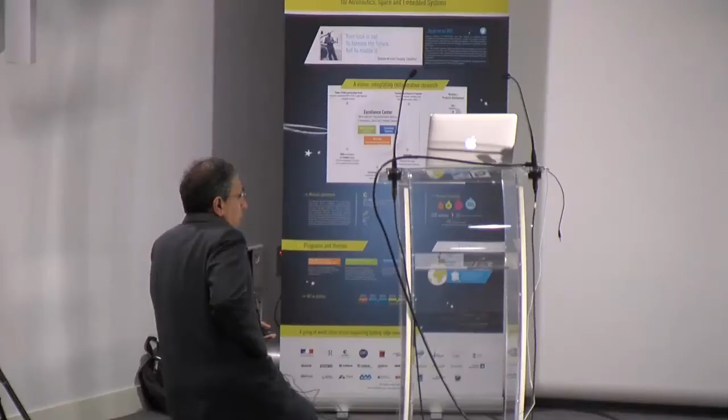Okay, please, Professor Advani. Well, it's my great pleasure and honor to be here, and thank you all for coming. I know some of you have come from far distances, so I hope I don't disappoint you in my talk here. I've spent the last 3 days here looking at all the things you're doing, and I'm really impressed, and I hope we get opportunities to collaborate in the future. I'm very happy for extending me the invitation and looking after me here, so thank you very much.

So today I'm going to talk about an ongoing effort to see how we can take the things we do in academia and help transition that into industry, to move the composite manufacturing field ahead. Literally, that has been my goal. Things are moving along, but slower than what I expect, though at least it's in the right direction.

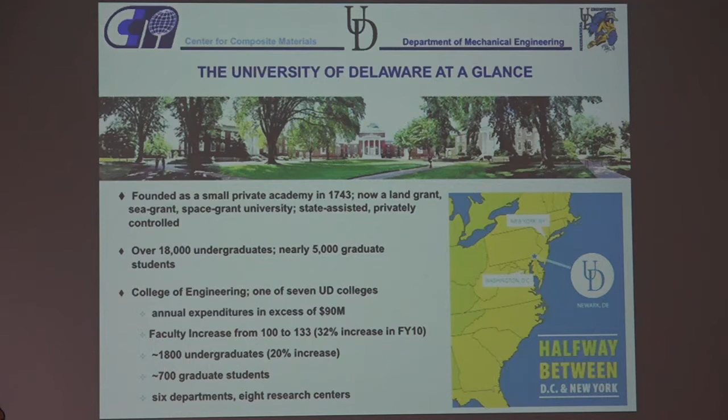Before I start, I want to tell you a little bit about my university and location. We are located right between New York City and Washington, D.C., right in the middle. In fact, I heard yesterday there was a snowstorm, 9 inches of snow, so people were sending me pictures of how the snow is piling up. I'm happy to be here instead. It's only 2 hours away from New York and 2 hours from Washington, D.C.

The university has over 18,000 undergraduate students and 5,000 graduate students. Our College of Engineering is one of 7 other colleges, alongside Arts and Science, Marine Studies, and so forth. We are about 1/10 of the population, with about 2,000 undergraduates and 700 graduate students, and we do about $90 million in research as a college. The college has 6 departments, like mechanical, electrical, civil, and so on, and 8 research centers.

The centers don't give out degrees; they're just a place for people to get together and work. One of the centers you're familiar with is the Center for Composite Materials, which has been around for over 40 years. It was the first center of its kind in the United States and has won a lot of Center of Excellence awards from pretty much every agency—NSF, ARO, ARL, ONR. Because of the name and reputation, we have a lot of industries that actually work with us.

The center not only does basic research, but also transfers technology to industry. It's kind of a combination of an IRT and basic research all put together in one place, with its own staff to do that. The professors, like me, are paid by the university but work with the center, and there are many other faculty who work with the center and advise graduate students who get degrees in their own departments, but use the facilities of the center.

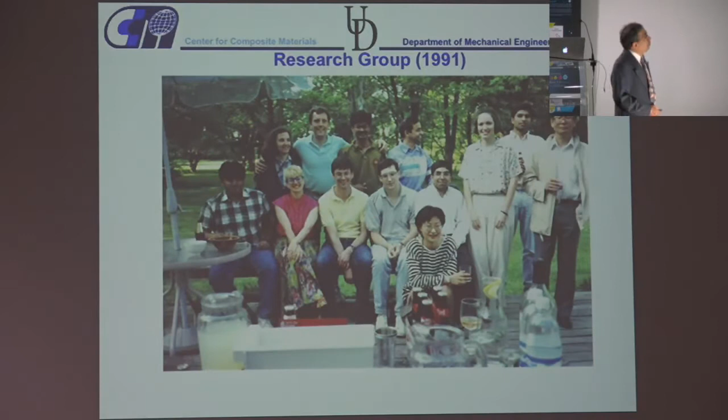You guys don't need any introduction to composites, but I'll mainly talk about advanced composites. I want to share a story about my early start in short fiber composites, which are coming back—there's a lot of work being done in short fibers as well.

The problem with short fibers was that you couldn't use them for structural components because the fibers were not long enough to transfer the load from the matrix to the fibers.

There are many applications of composites, all lightweight, and it's spreading into different areas. One thing I'm excited about, though there isn't much going on yet, is how not to design composites as 'black aluminum'—if you're going to replace something with a composite, don't just make it the same way.

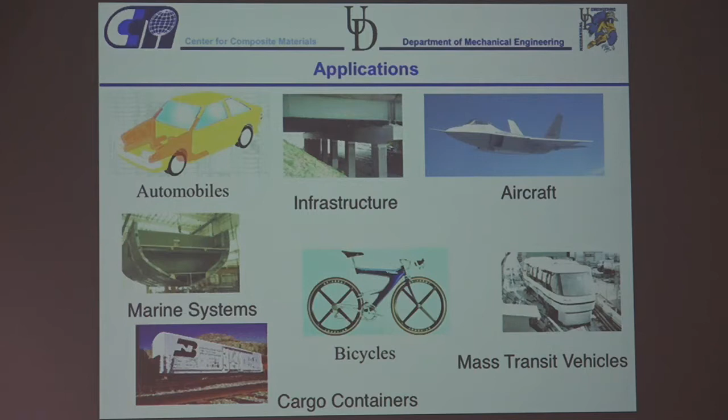I know some of you are starting to build design and coupling it with manufacturing.

So first, the story about going from short fibers to continuous fibers.

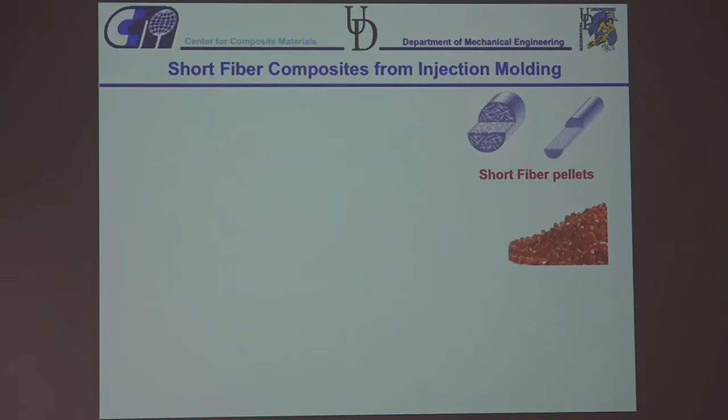In short fibers you usually have pellets with short fibers embedded in them. You put those pellets into a hopper, they go through a screw and into a mold, and you can make parts like this. The advantage of short fibers is it's based on polymer processing, so you don't have to change the machines—they're very fast. You can make parts in 30 seconds to a minute, so that's the big advantage.

The other short fiber composite process is SMC, where you have your resin and chop the fibers in between, and this becomes your charge that you take to where you want to make the composite. You cut it up, place the charge in the machine, and compress it. You can make pretty large parts with it.

So injection molding and compression molding were very widely used for making short fiber composite parts.

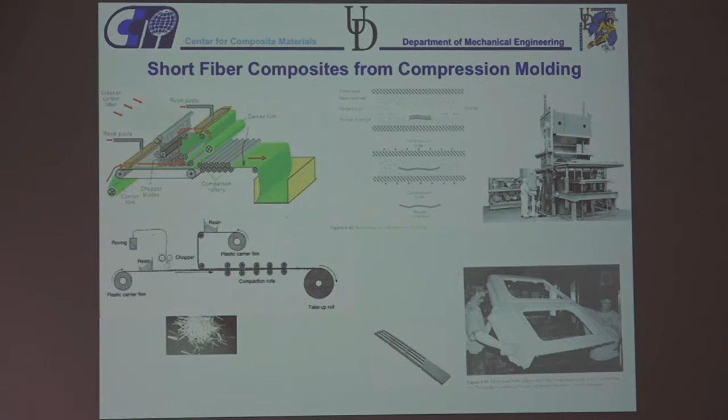One of the problems is that the fibers orient with flow because it goes as a suspension and the fibers can change orientation. Whenever there's flow inside—say a shear flow—if you're injecting it from here going this way, you'll get a lot of fibers aligned in this direction. If you go the other way around, you get extensional flow in this direction because of the divergent section, and the fibers align that way. So by changing the injection location, you've changed the properties of the part.

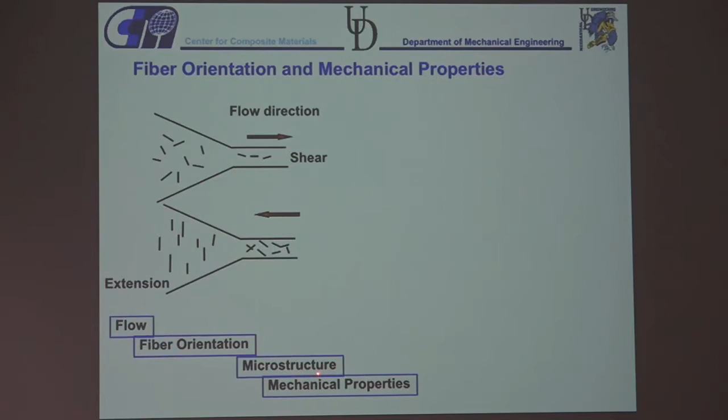So you have flow that affects the fiber orientation, which affects the microstructure, which affects the mechanical properties. Obviously, if all the fibers are aligned in one direction, you have much better mechanical properties in that direction compared to the transverse direction. So direction plays an important role.

So very early on, we said okay, we want to be able to predict the fiber orientation in flow.

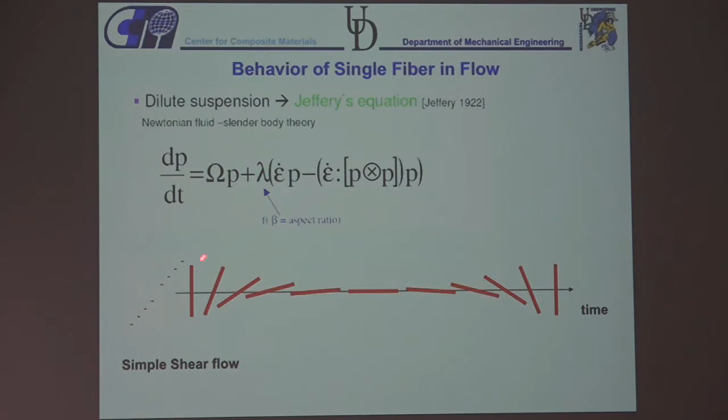This is an equation developed by Jeffery in 1922 for a single fiber describing how it rotates in shear flow. P is the vector that points along the fiber, omega is the vorticity, epsilon dot is the velocity gradient tensor. He came up with this equation that lets you see over time how the fiber will rotate. Most of the time the fiber spends aligned in the shear flow, and sometimes it pole vaults. This was an analytical solution, and lambda was the aspect ratio of diameter to length of the fiber.

But in composites, we don't have just one fiber, we have lots of fibers. So taking a single fiber equation and using that orientation isn't really the answer, although we do have a solution in that case. So early on, I developed an equation to describe the orientation state.

Instead of describing the orientation of one fiber, we describe the orientation state with the orientation second order tensor. So the tensor gives you the orientation state. And it's also very nice because if you want to find mechanical properties, your elastic modulus can be a fourth order tensor, so you can actually use the orientation state to get those values.

This allowed us to actually predict the orientation state from flow. You see there are very similar things that were in Jeffery's equation, but it is now extended to an orientation state, and we introduce what we call a fiber-fiber interaction parameter because the fibers are close to each other and they're going to interact. This interaction coefficient depends on fiber volume fraction, concentration, and so forth.

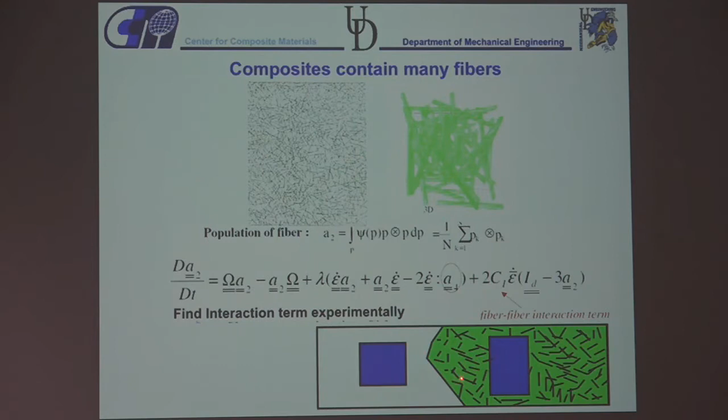But it's a phenomenological parameter. We don't know how to find this from first principles. But we could come up with experiments to characterize it and so forth. And then we can predict the orientation of fibers in a flowing suspension for short fiber composites.

So the reason I showed you this was a story I want to tell you that has become my philosophy, that my advisor told me many years ago. So the story is that there are two people here looking for something under the light.

This person comes up and says, 'What are you looking for?' They said, 'We are looking for our car keys.' So he says, 'Okay, I'll help you,' and starts looking there too. After a minute, he asks, 'Where did you drop your car keys?' And they say, 'Well, we dropped it next to the car.' So he says, 'Why are you looking here?' And they say, 'Well, there is more light here.' So that's why they're looking over there.

So if you use Jeffery's equation to solve a composite problem, yes, you have a solution, but that's not the right solution, and you know that, but you still do that. You see a lot of scientists doing that. They're more comfortable solving problems that have closed form solutions, even if they're not the right solutions. So the question is to ask the right question. Don't be afraid to look in the dark and move your light in the search space.

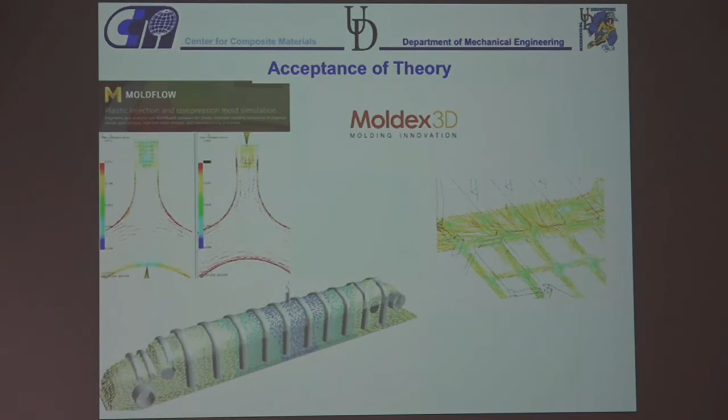That's basically the message I got, and that's what I've been trying to follow in my research. And actually, the theory we developed was really nice to see in use. There are two computer programs now commercially available, Moldflow and Moldex3D, that both use our theory, the method we developed, to look at fiber orientation in injection molding components. So they literally use this. Of course, we have to come up with this interaction coefficient, but they find they are able to make better predictions. So that had a good end to the story.

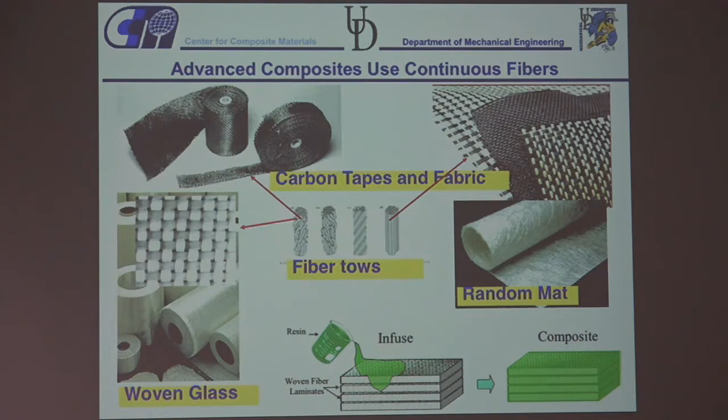After I moved to Delaware, after a while I started working in continuous composite fibers, where the main area is basically when you have dry fibers and you infuse the resin in some form to make a composite. There are fibers that come in various forms, and different resins.

Very early on at our center, we had these three guys who are very famous in the mechanics of composites - Roy McCullough, Tsu-Wei Chou, and Jack Vinson - who were working on looking at how to predict the structural properties of the composites using micromechanics and so forth.

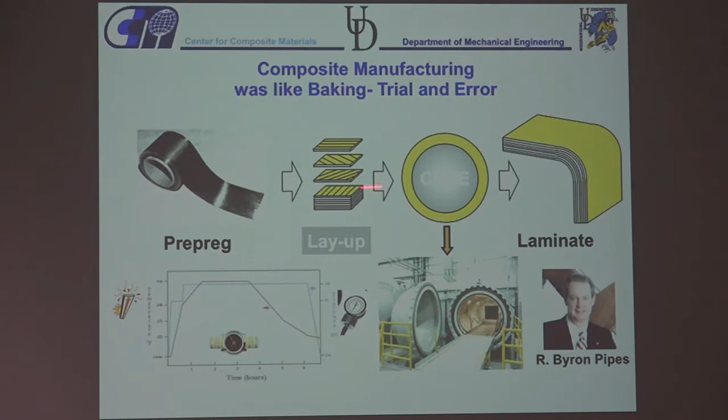Around when I came, there was Byron Pipes, who had worked for Boeing. He said that at Boeing, they're all using trial and error. There is some science in composites, and we should try to address the science part in manufacturing.

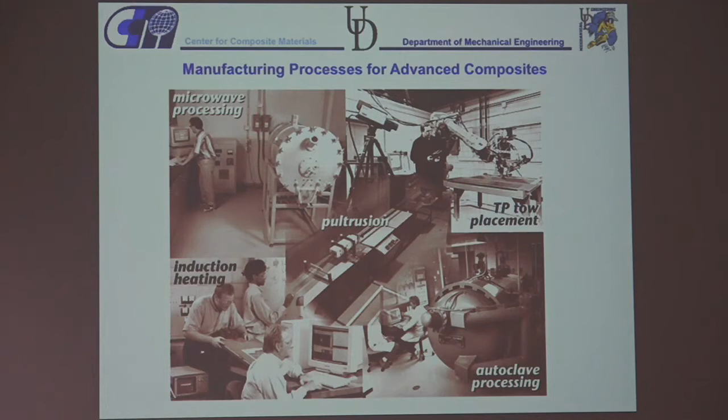So there are many processes, and we have been trying to develop models and simulations based on scientific principles for this. The whole goal was that in short fibers, you don't have great properties but it's very easy to process. In continuous fibers, you have great properties but it's very difficult to process. So the goal was to improve the processing of continuous fibers using a scientific method.

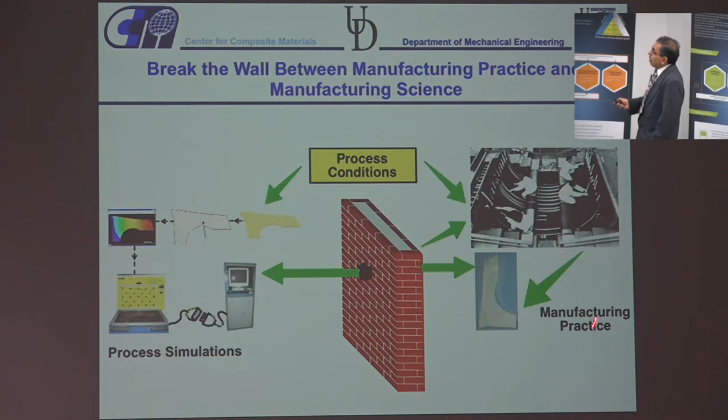My personal goal was, can we bridge the gap between manufacturing practice and what we do in the lab, so that we can build process simulations that can be used directly in manufacturing practice. Although it's two different languages that people speak here, we can build interfaces to help bridge the gap, and I see a lot of you are already doing that here.

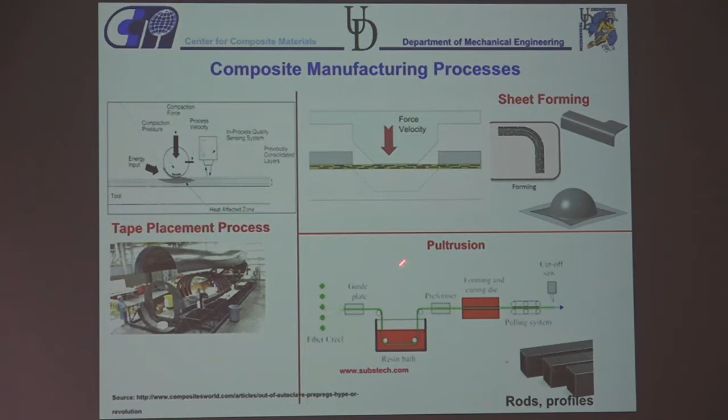There are many composite manufacturing processes such as tape placement, sheet forming where you're trying to form the composite, pultrusion where you're continuously drawing the fibers, and then the infusion processes such as RTM and VARTM, which is what I'm going to focus on. You also have autoclave, out of autoclave processes, and compression molding.

So there are many different processes, and the main goal in all of them is to reduce defects, improve the time scale of how fast you can process, and reduce variability. Because composites are heterogeneous, there can be a lot of variability in the properties. Those are the three basic goals.

One of the things I did on my last sabbatical—I didn't go anywhere, I stayed in Delaware—I worked on a book about the science base of these processes, and I divided them into three categories.

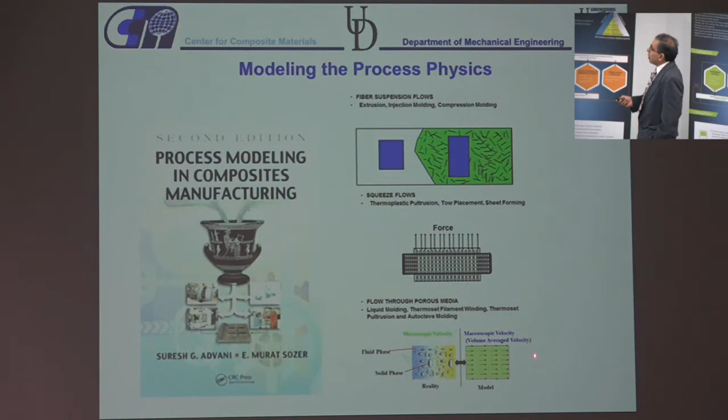You have fiber suspension flows where the resin and fibers flow together, squeeze flow in thermoplastics where the fiber and resin also flow together, and then for thermosets or thermoplastics with low viscosity that polymerize later on, you can have fibers where the resin actually moves relative to the fibers, modeled more as flow through porous media. That's what I'll talk about today.

The two main common processes of liquid composite molding are resin transfer molding and vacuum assisted resin transfer molding. The big difference is in resin transfer molding you have two rigid molds. You infuse the resin from a gate, and when the resin comes out at the vent, you close the inlet, let the resin cure, then open the mold and hope you got a part without any dry spots.

In vacuum assisted transfer molding, you don't have the second rigid mold, but you have a bag that covers the mold. So the only pressure you work with is 1 atmosphere, where the resin comes in at 1 atmosphere and you have vacuum at the other end. When the resin reaches the vacuum port, you close the inlet and keep the vacuum until the part cures, then take your part out.

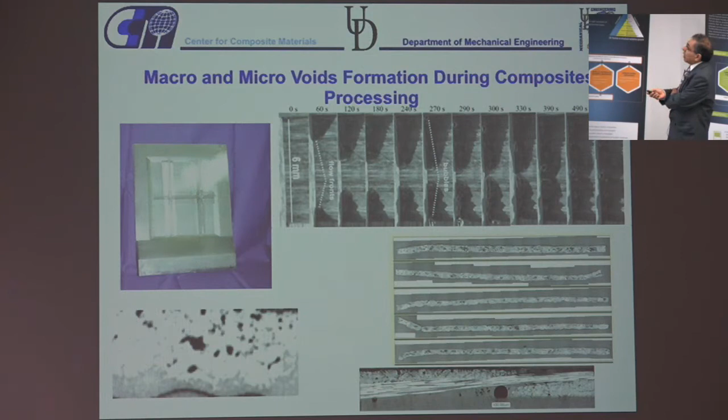In these processes you can get big dry spots like this, and because it's a thermoset resin, you literally have to throw away the part, since once the resin cures you can't do much. You can also have micro voids inside the tows, or voids where flow fronts meet. So you could have voids inside the tows, around the tows, and dry spots—the key is to get rid of all of these.

So very early on we said, okay, let's first address the macro problem, because right now there's only trial and error. Any effort we spend helping manufacturing practice will be really good, so we don't get parts like that. Because once you close the mold, you cannot see inside, so a simulation would be very, very helpful.

So I'm going to talk about process modeling on three scales: the macro scale, where you predict these big voids and figure out how to control the flow in the process so you don't get defects like this. Mesoscale modeling is when resin flows faster between the tows than inside them, so you have a dual scale flow—how do you get rid of the voids in that case? Then micro scale modeling, when you have flow between fibers and capillary effects become important.

So first, at the macro scale, the governing equation was Darcy's law. In 2D, you would write down average velocity is proportional to the pressure gradient, and the proportionality is basically the permeability of your material, which you have to characterize because that comes in as an input. The difference from normal Darcy's law is that it's anisotropic, so I could have different resistances in different directions, which I can express with this permeability tensor.

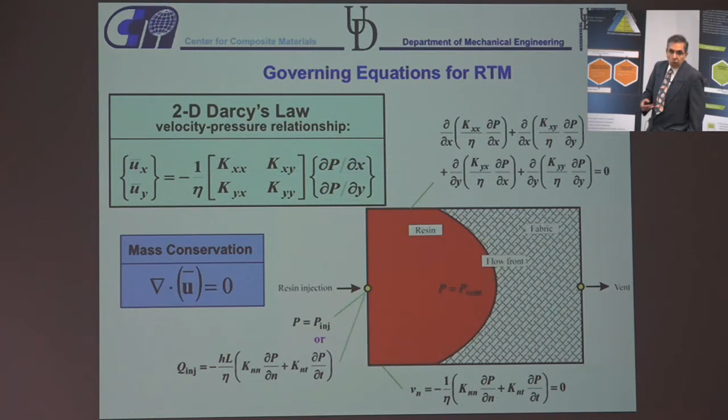Now, of course, you can extend that to 3D, and then instead of having to deal with 4 values, you have 9 values to deal with when you're doing this. The nice thing is, hopefully this—well, we have proved this—is a symmetric tensor, so you only have about 6 values to worry about that you have to calculate. The reason you need to solve 3D in VARTM is because usually in VARTM you put a distribution media on top, which allows the resin to go faster on the top, so in reality through the thickness you have a 3D flow, that's why you need to solve it as 3D. In RTM usually that is not present, so you can do it as a 2D problem.

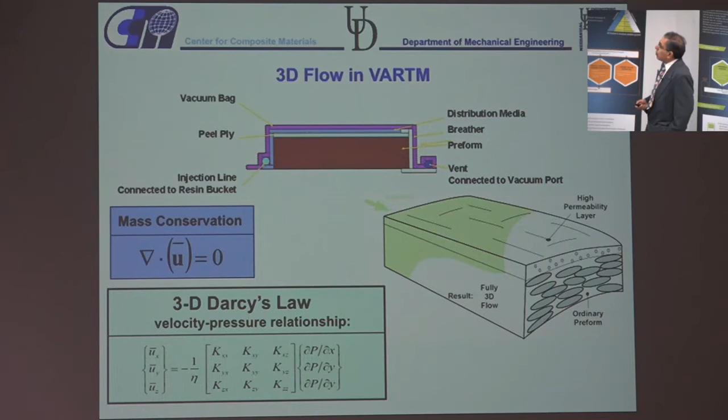So what we did was come up with a way where you don't have to remesh. You make your mesh the first time of your part, and it could come from the design aspect where people are designing the mold, and they can mesh it. So once I have the mesh, I can solve for the pressure field wherever I have flow inside the mold. Initially I may have flow in just one node that has just come in, and I solve this equation just in that domain.

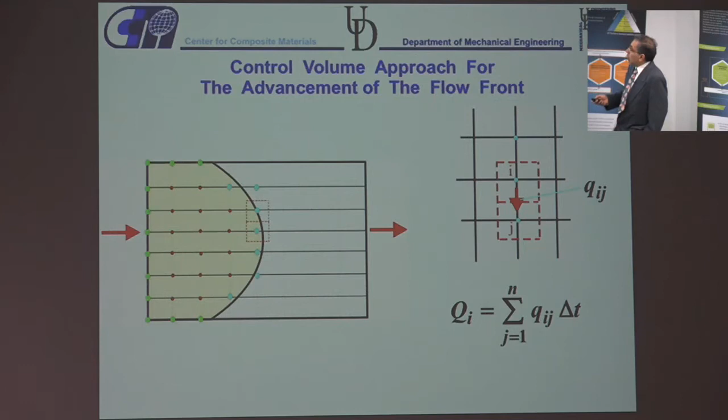Once I know the pressure, I associate a fill factor with each node, and I update the fill factor. Initially, wherever there is resin, the fill factor is 1. Wherever there is no resin, the fill factor is 0. Once I find the pressure, I can calculate the flow rate that goes from one element to the next, and I can update the fill factor. So at the next time step, my domain has changed because the fill factor that was 0 or less than 1 has become 1, and that way I can update my filling domain. That's how we solve the problem.

Now, one important aspect is the permeability. We still need to know those permeability values. So very early on, we built a setup where we inject the resin into the fabric. What we do is we have 2 see-through plates where we put the fabric in.

We inject the resin from the bottom into the fabric, with a camera at the top and a camera at the bottom. By image analysis, we can match how the flow front is flowing at different time steps. From that, we were able to analytically calculate the permeabilities of various fabrics in the X direction, the Y direction, and the Z direction.

What I want you to note is that in the Z direction, the permeability can be two orders of magnitude less than in the X and Y direction. So even if you're sending the flow really fast in the top plane, it is infusing in the lower planes much more slowly.

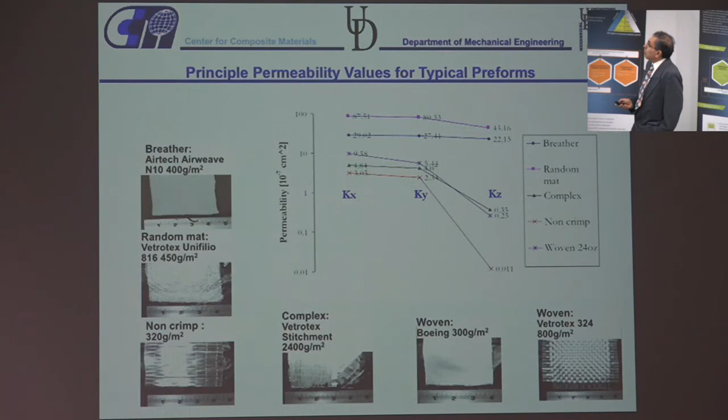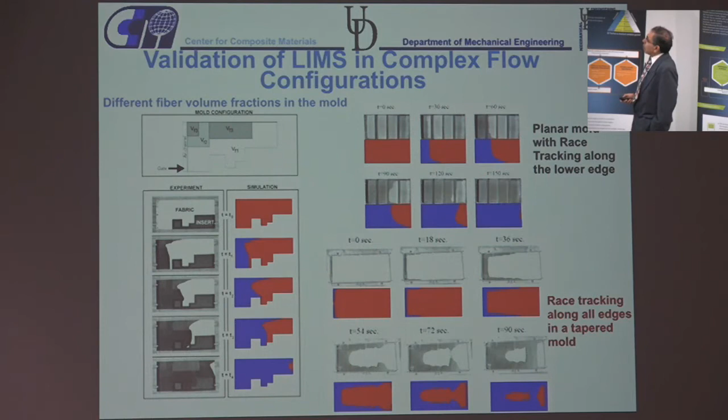And we can do very complex structures. So one of the beauties of the simulation is because of the way we do it, it's very fast. To simulate something like this with 10,000 nodes on a PC takes about 10 minutes. So we can do a part with 10,000 nodes in 10 minutes, which allows us to do optimization and look at different possibilities very quickly.

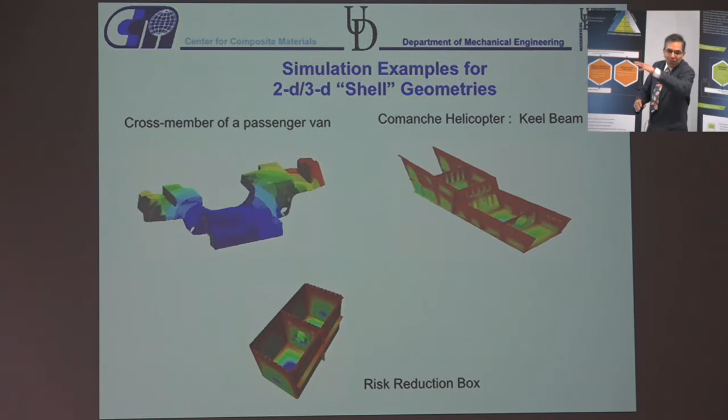At this point I should have said, okay, work done, let's stop working in this area, move on to the next, but there were still problems. The nice thing about working in a center is that industry comes in and tells you their problems. So as an academician, you try to think about how to address that, because that's the challenge.

Here, the problems are, they're saying, okay, you can predict the dry spots, but when we take a micrograph of the part, we see that we still have porosity inside, between the tows or inside the tows. What that told us is that we really need to model this as a dual scale porous media. The resin comes in faster in between the tows, and then it's impregnating the tows.

So we decided to say, okay, how do we address that? Here we did some experiments where you inject the resin, and notice how it's all dark here, but you have some white areas. The reason is the tows are still filling.

So the resin is coming in, and initially we were modeling it like this: the tows filling at the same time as the regions around them. But in reality what's happening is the resin is going further and these tows are filling later on. If you don't fill those tows, that's your porosity.

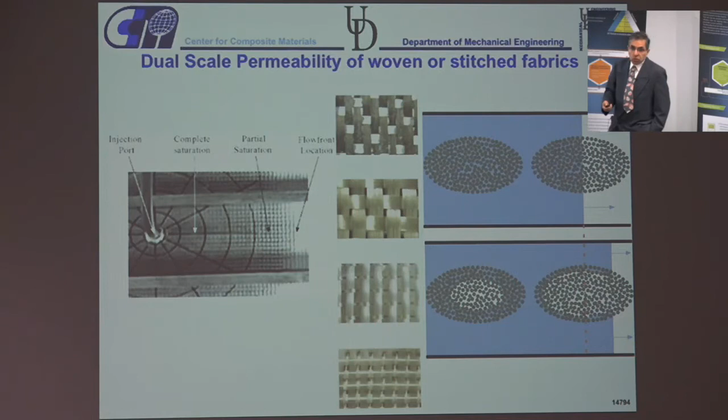So we decided to do multiscale modeling, where in our existing mesh, we wanted to do it in a quick way. We don't want to, remember, if I can give the industry 80% of the solution, they're happy, because right now they have 0% of the solution.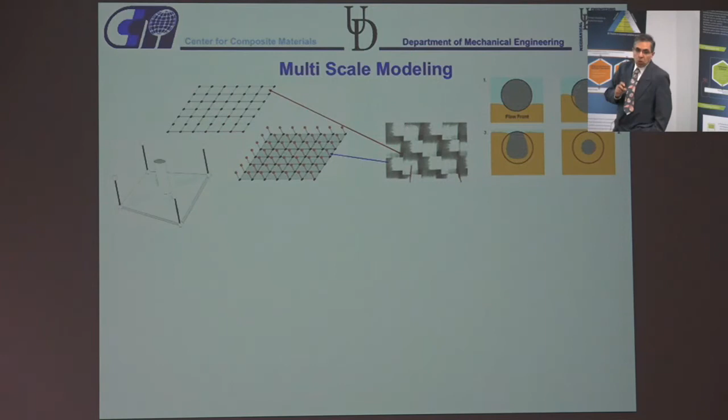So here we said, okay, let's assign one-dimensional elements to our mesh, and these one-dimensional elements represent the fiber tows. These tows will have their own permeability, which will be different from the bulk permeability that you measure in the experiment. They will have a much lower permeability, and we can actually calculate the volume of the tows, so we can have a separate volume fraction for the tows.

Now we can use the same simulation with these additional elements. The only price we have to pay is we have to introduce a second permeability, one for the tows, for these elements. So now if I inject the resin here, the red area is where the fill factor for one-dimensional elements and two-dimensional elements is 1, meaning they're all filled. Between the two black lines is where the regions in between the fabric are filled, but the tows are not completely filled, and beyond that is where there is nothing filled.

What is the advantage of doing it this way in manufacturing practice? I want to keep injecting the resin not until this line arrives here at the vent, but until this other line arrives at the vent, because that will ensure the tows are also filled. So I would let the resin bleed, go to waste a little bit, until that line arrives. The simulation can tell you how long you have to wait before you shut off the injection.

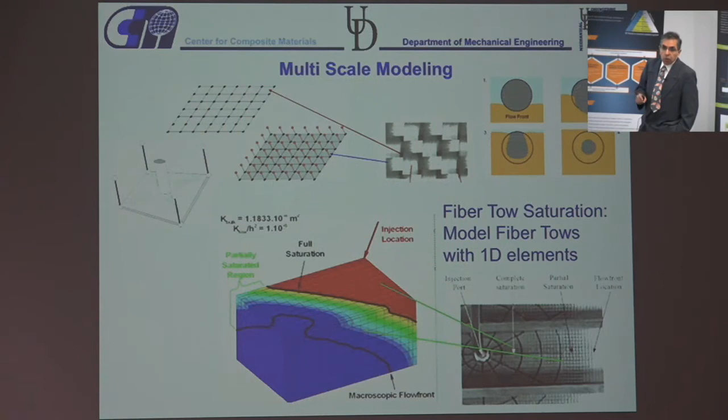So how do I find this second permeability? We came up with an analytical solution for a dual scale porous media. When you have a single scale porous media, where the tows and the resin along the tows fill at the same rate, and you inject at a constant flow rate, the pressure increases linearly.

That tells you it's single scale porous media when you run this experiment. If the tows fill a little later, the pressure is not a straight line but has a slight drooping effect, because resin is still going into the tows while the flow front moves ahead. When you see that kind of pressure profile at the inlet under constant flow rate injection, you can use my analytical solution, which includes the bulk permeability and the tow permeability, to match your experimental profile.

Usually the bulk permeability is given by the slope very close to the inlet, so you can find that value immediately, and then you keep changing the tow permeability until the curves match. So from one experiment you can get both the bulk and the tow permeability values.

You can apply this methodology—we did a simulation of the hood where you inject on the dual scale, and you find this region is partially filled when the resin reaches the final vent, after an hour and a half. Then I have to continue the simulation for another hour and a half to make sure that other region gets filled. So it took twice the time, and I wasted some resin, but I was able to saturate the complete part.

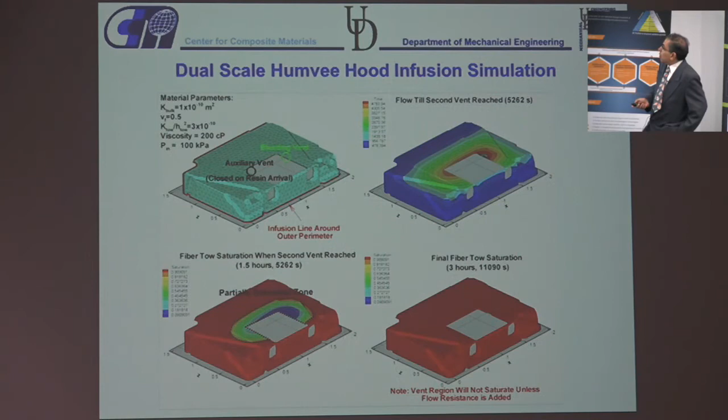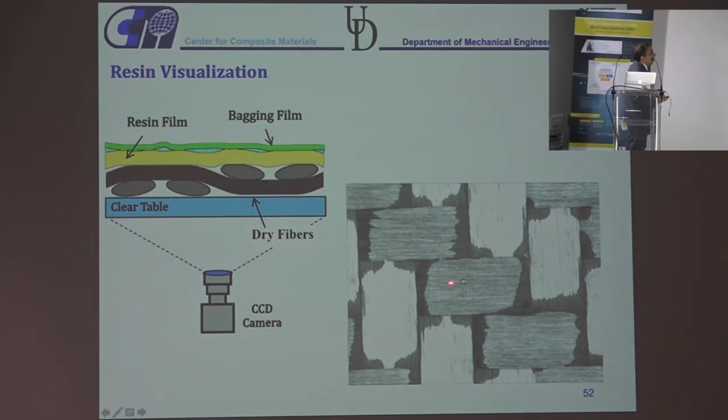Another thing that happens—hopefully this video will play—is there's a resin film on top, and as you compress it, resin comes in through pinholes and starts to spread into the tows. This again has the ability to capture voids, and the size of the pinholes introduces all the variability that happens here.

If I take a fabric and photograph it, these are the pinholes through which light passes. Notice that no pinholes are the same size, and they aren't uniformly distributed—this is the variability you're introducing in your composite processing.

If you have a distribution media on top and watch from the bottom, you notice that if the resin goes really fast on top, you end up with dry areas. So we said, let's see if we can model this.

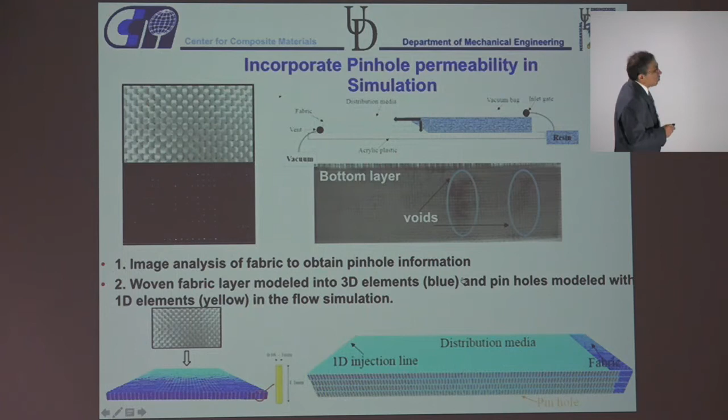We started introducing a stochastic way of modeling it. We place pinholes at different locations—this is our distribution media on top, and these are the fabric layers. By taking a picture of the fabric, I can use a Gaussian or similar distribution to lay down the pinholes, then look at how flow from the distribution media passes through them. Here the pinholes are laid randomly, and if the distribution media is very permeable—the most permeable case—you get a spotting effect.

The blue is when the resin arrives first, the red is when the resin arrives last, so you're going to get dry spots here. If you make your distribution media permeability two orders of magnitude less, you see the flow front at the bottom layer moving more uniformly. This is counterintuitive: you'd tell manufacturing not to use a highly permeable distribution media, but you'll get a better part. What we learned from simulation we were able to transfer in a few words, so they don't have to run the simulation themselves.

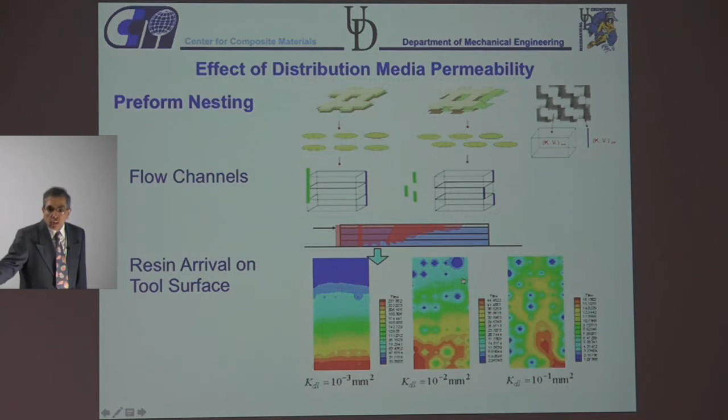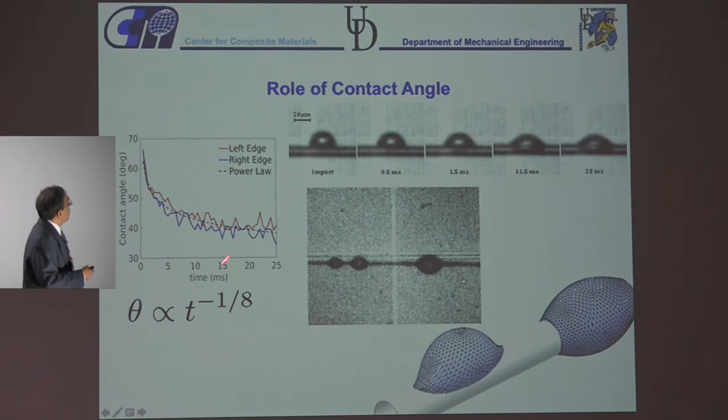Now on the microscale level, usually you put a drop of resin on a tow, and this contact angle plays an important role in how quickly it goes inside the tow. You can measure the contact angle easily, and there's a law governing that. One thing to mention is that capillary pressure between the fibers is only important where you have vacuum, because capillary pressure is very low compared to a pressure that's about one tenth of atmospheric pressure, so it only plays an important role near the flow front.

This capillary pressure depends on the distance between the fibers. If I take this third fiber—so this is one fiber, this the second, this the third—and move it away a little bit, the capillary pressure can change dramatically. So when you look at a tow, if the fibers are not uniformly arranged, the capillary pressure inside is not the same everywhere, it's different, and that's what we can show here. It also depends on the contact angle of the fluid: if the contact angle is small, the capillary pressure is higher, and if it's high, the pressure is smaller. As I said, this matters more near the flow front, not here, because the pressure is much higher there.

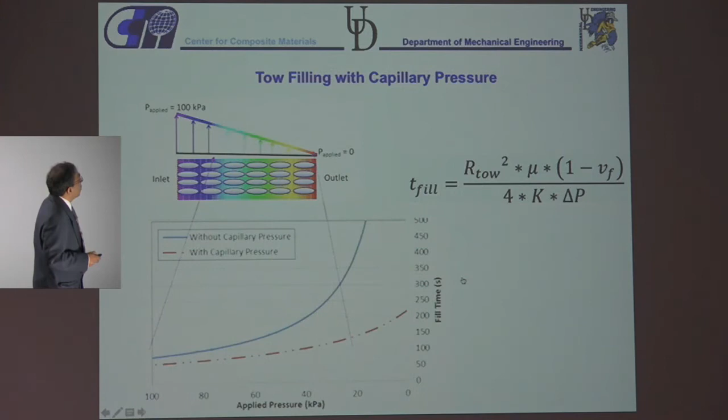As you can see, the effect of contact angle—you put a drop and it takes 24 seconds to go in. It may take longer with a less wetting fluid. This also has advantages, for example in additive manufacturing.

Here's a case where you have a fiber tow going through an inkjet printer, where you can drop a fluid onto the tow and see how it spreads into it. You drop it at time t equal zero and see it spreading a little bit, and when you introduce the second drop, you see the interaction between the drops over time. This gives you an idea of how fast you should move the tow, how fast you should drop it, and what size the drop should be.

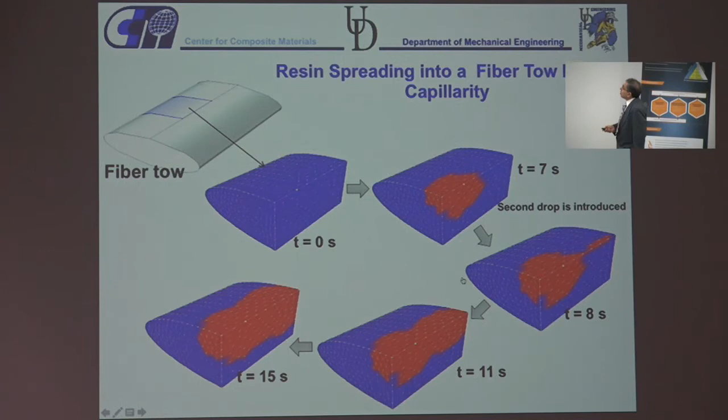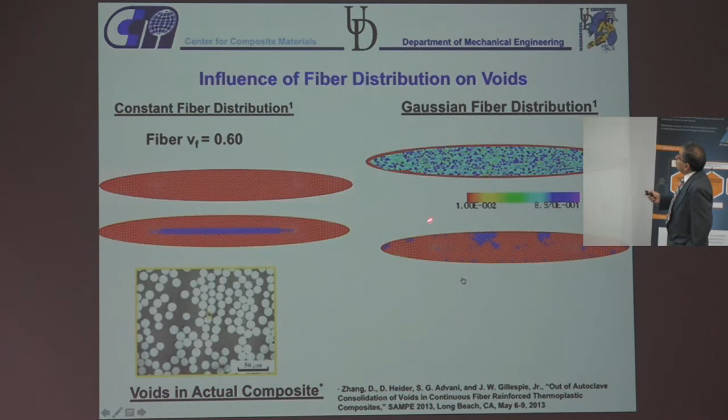We can model that with our own simulation. At this level it can also tell you that since the fibers are not uniformly separated, the capillary pressure will be high in some regions but not others. If you keep the capillary pressure the same everywhere, or the distance between fibers the same everywhere, and introduce resin from the outside, you'll find the void, this blue area, right in the middle. However, if you introduce varying capillary pressure—denoted here by the fiber volume fraction being different inside the tow—you notice the voids are spread out instead, which is what's observed in practice. The voids are never in the center of the tow. So if you can get the voids to the edge of the tow, you can vacuum them out and prevent voids inside.

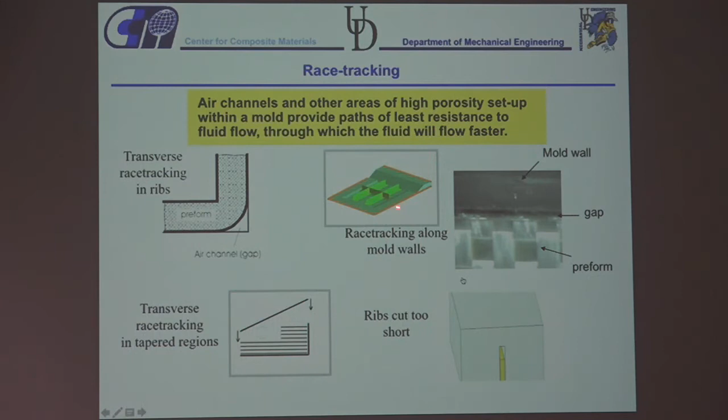Okay, so that was modeling at different levels. Now, how does material and process variability introduce more problems for us? One very common process variability is race tracking. When you put the fabric along the walls, you get some channels, some areas where it's not completely flush, so there's a gap. You may have ribs that are cut too short, and all this causes the flow to go faster in that region. You can have either weak race tracking or strong race tracking.

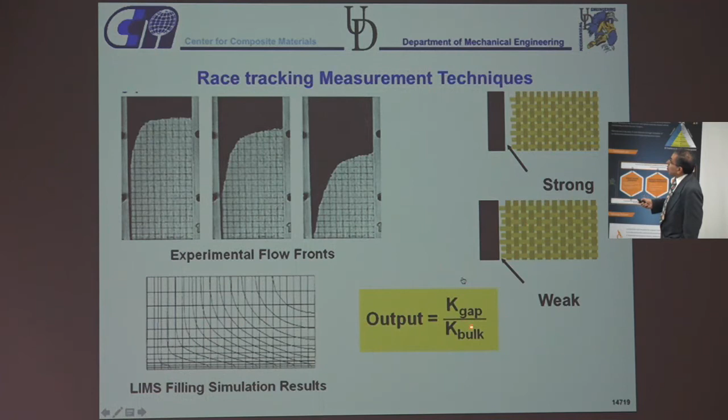So it's practically impossible to have no race tracking along the edges when you cut a fabric, because even if you cut it really well, the resistance here is going to be different than the resistance here. So there's always going to be a higher permeability in the gap than in the bulk region.

And you can see this. This story is again from ARL lab, which basically they were trying to make this 40-foot keel beam of the helicopter by RTM, and then they found voids in the bottom. They did not use any simulations or anything like that. They just designed the mold, did it, and then tried to fix it by putting some unidirectional fabric to get the resin to go in here. After making a couple of attempts, they decided that they should just go back to the autoclave.

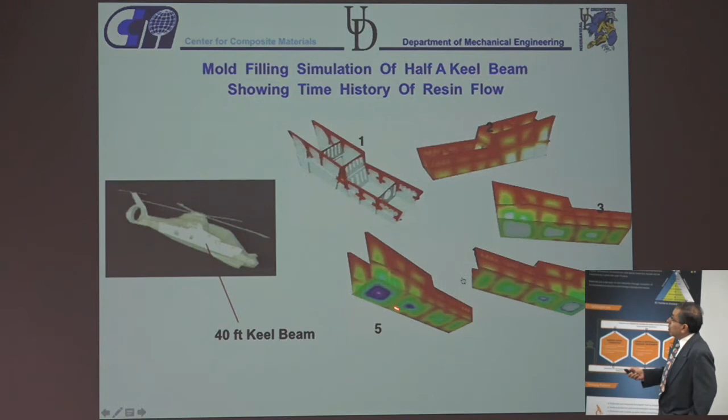I asked them to provide me the part much later on, 2 years later, and I just put some race tracking along the edges. I said the resin flows 5 times faster in these gaps than in the bulk, and I was able to predict that the voids actually will occur in the bottom, because this is the region where the resin arrives last. So they were really very impressed that, even with not having much information, we were able to give them some answers.

So many other examples of race tracking, like when you put inserts inside the mold, you can have race tracking. And what happens is, if you don't include that in your simulation and you say okay, the vent is here, then if you have race tracking, the flow goes faster there, goes past the vent, and even if you're letting the resin bleed, you have trapped air and you can't get that air out, and you'll get a void there.

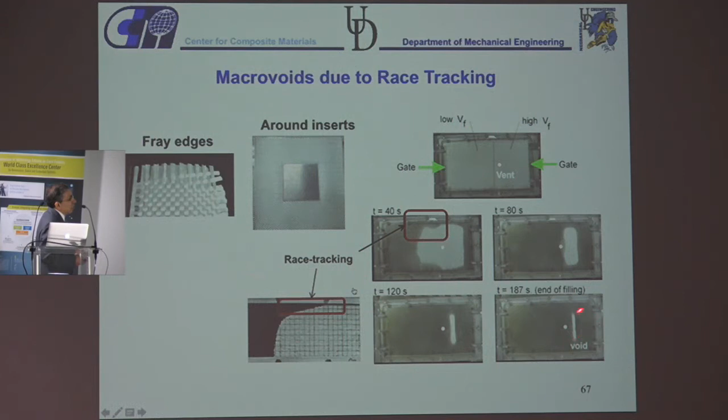So I said, okay, is race tracking something that is predictable? This is the advantage of being in academia, is that I had 5 students do 10 experiments each, where there was race tracking along these 5 edges, 1, 2, 3, 4, 5, and we injected it from the 2 sides, and here is the mold, and we had sensors in different locations to see when the resin arrived there.

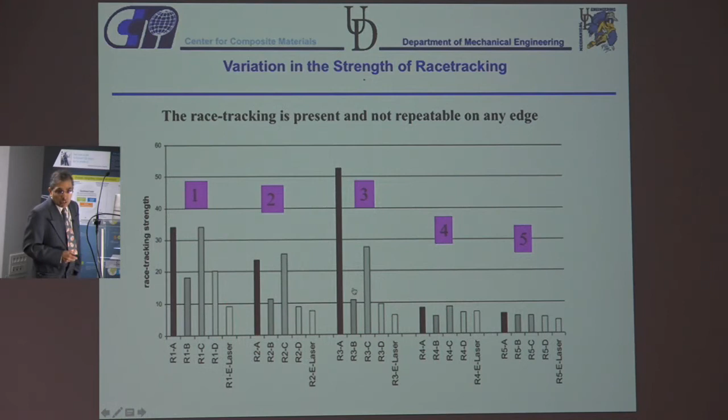Here are the results at those 5 edges by the 5 students, and this is the average of their 10 experiments. So at each edge, the race tracking was different for each student, and you could probably look at this and see which student was more careful and which student was less careful. But this is the average of 10 experiments, not just one experiment that they did.

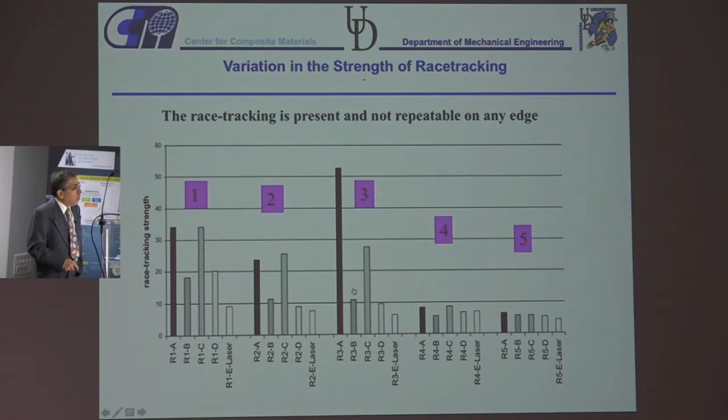So what it told us was, you can't fight race tracking. It's going to happen. You can't have skilled labor that's going to prevent it. So instead of fighting it, let's figure out, when we have race tracking, what is the great place to put the inlet and the exit.

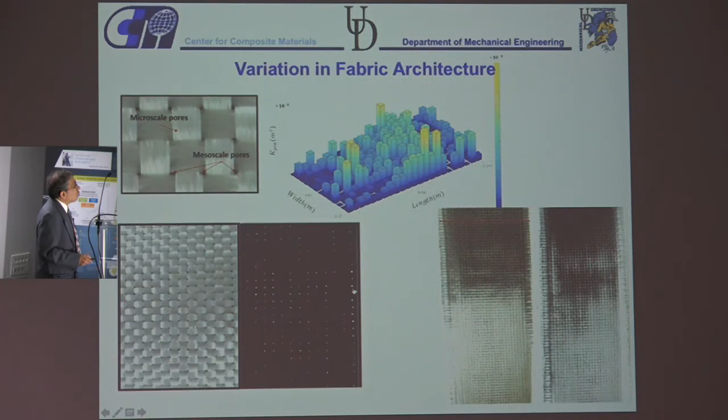The other thing we talked about was when you have these pinholes, and they can be different for different fabrics. So this is the pinhole distribution in this fabric, the diameter of the pinholes. And you can see, because of those pinholes, you get these flow fronts at the bottom, because the resin, when it comes from the top, wherever there is a pinhole, it comes to the bottom and then starts to spread around. So we have to be able to address those kind of issues too.

So how can we do that? Some examples. The first case we did was passive control. What is passive control? Okay, so I want to make this part. I have high fiber volume fraction in one place, low fiber volume fraction in another place. I could have race tracking at the top, I could have race tracking at the bottom. So what I do is look at all the combinations of race tracking, run the simulations for all of them, and then find out what is the best way to put the gate and where is the best way to put the vent. Here's an example.

So if I have a gate here and I have race tracking along these 3 edges, and this is the distribution of race tracking, which means most of the time I will have low race tracking, some of the time I will have high race tracking, and I can assign a probability to it. Then I can run the simulation so that I have 4 types of race tracking here, 4 here, 4 here. So I have 256 scenarios. I can run 256 scenarios, weigh them by their probability, superimpose all of them, and then figure out the probability of where the resin will arrive last, and I can put the vents over there.

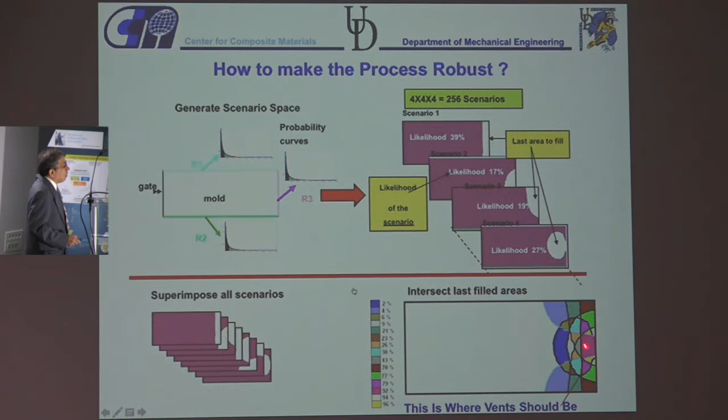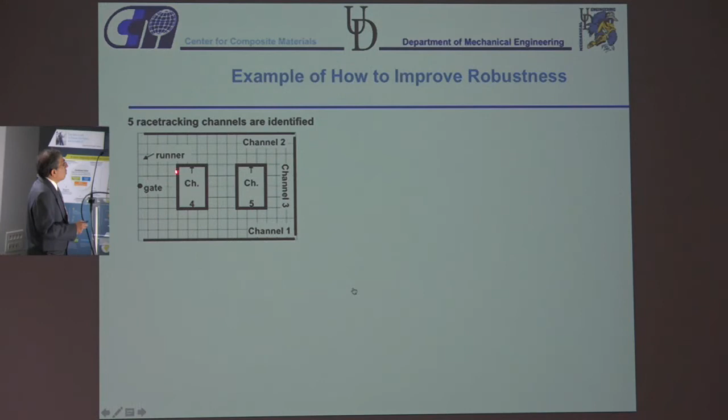So here's an example where I have this mold with two channels, so race tracking can happen along the channels and along the top and the bottom. There are 4 discrete values of race tracking, from no race tracking to weak to medium to strong.

And you have 5 edges, so I have 1,024 scenarios. I run all the scenarios through my method to see where I should put the vents. And look at this, it's not intuitive. You would put the vents over here. The intuitive approach, if you had 3 vents, would be to put it where the first insert is, the second insert is, and at the end.

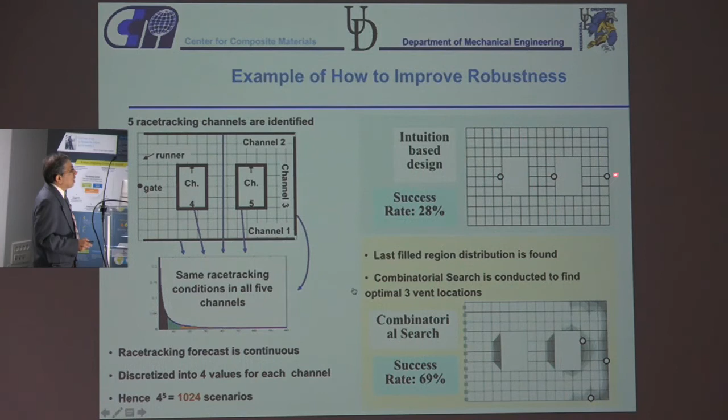That would be your intuitive based design. This is based on accounting for the race tracking probabilities. What we did was we ran 1,000 simulations with random race tracking along the edges. The intuitive design was successful only 28% of the time. This method was successful more than twice that. Not 100%, but it improved the probability. And this was a passive control. You didn't have to do anything in terms of the manufacturing practice.

So now here's another example where the distribution media - usually what people do is they just put the distribution media on top, covering the whole thing, maybe leaving a little gap so the resin just doesn't go into the vent. But what if you had ribs along here? They'll say, okay, just cut it along the ribs and put it over there and see what happens.

So if you put the distribution media like that and run your simulation with the vent over here, you will see that the resin arrives at the vent much before it fills this region. All I made is a small change here - I say, just cut the distribution media all the way to the end, so now the distribution media is not here, and I introduce the inlet at the same place. That small change in the distribution media design will allow the resin to arrive at the vent last, and you'll get a good part.

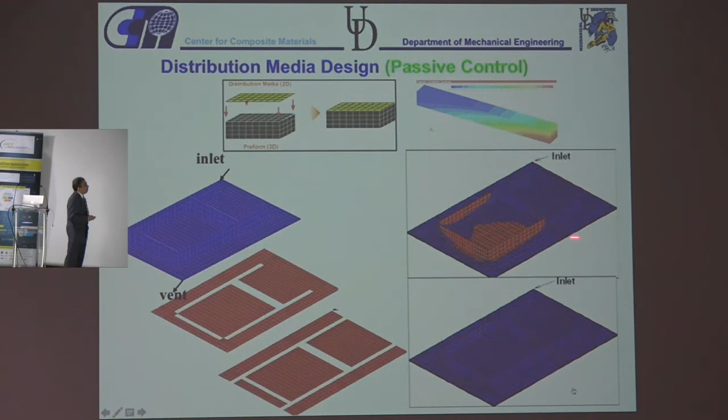So the difference between a good and a bad part is so small. And this is something they can easily introduce into manufacturing practice.

But the question is, how do you design this? One way is to come up with a methodology - that's your scientific part. You come up with, okay, how do I design it in a scientific way? How do I assign a permeability map to my distribution media?

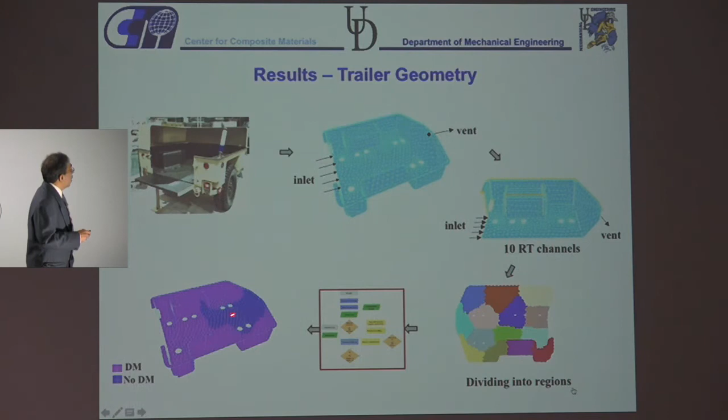And again, you'll say, how would you do that in manufacturing practice? It's easy. You can cut the distribution media and attach it to your bag that you use to cover the mold. So it's not like you have to have some special skills.

And you do that, and then you find that you have 1,024 possible scenarios that can take place because of the 10 race tracking channels. In all cases, with that distribution media design, we were able to fill the part. Whereas if you had the distribution media covering the complete surface, there were many times when you got voids, and those would be your rejects - you would have to throw away those parts.

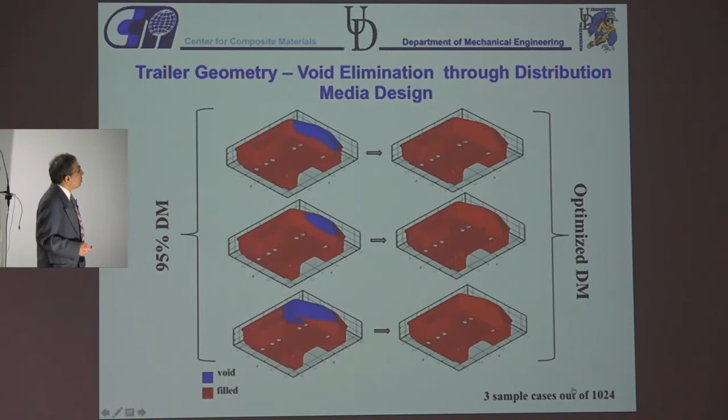And today, the manufacturing practice is such that people build into their cost price some amount of failure. So they know that if they have to make 100 parts, they would build 150, because they know some of the parts will not be manufactured properly because of these variations.

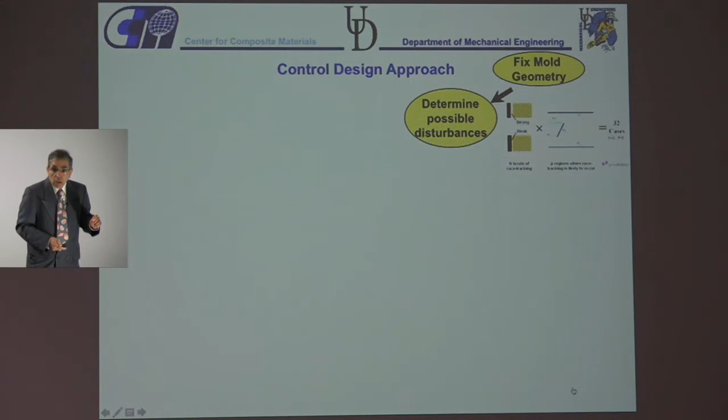Okay, so how do we go from something that is passive to something that is active control? So the way you do that is you put sensors into your mold, and the sensors tell you what kind of scenario is taking place. Once the sensor tells me what scenario is taking place, I identify what that disturbance is, and then I use an active control, an actuator that can steer the resin in the direction I want it to go. That way I will always get 100%, and this can be automated. So this could become a part of your equipment.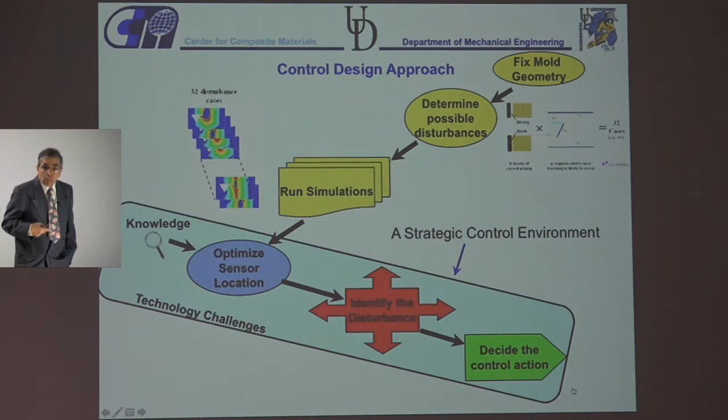This was done under an ONR program where we used the simulation to figure out where to put the sensors so I can figure out which scenario is taking place, and then I can run offline the scenarios and design a control action, and once I know which scenario is taking place, I can put the right corrective action. Let's take an example where I have a part with an insert.

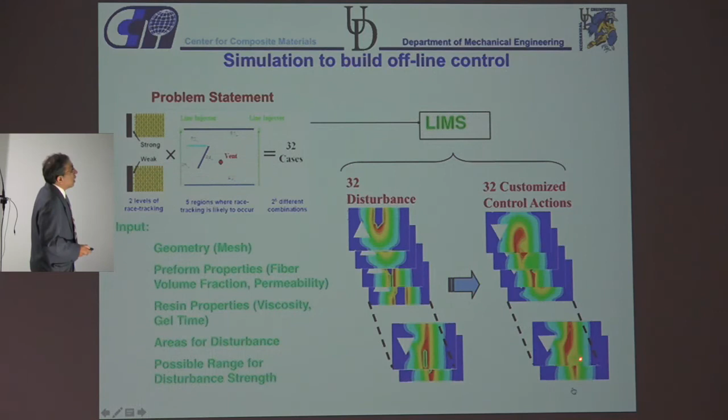So I can have race tracking along the three edges at the top and the bottom, either weak or strong. So I have two levels of race tracking, weak or strong, giving 32 scenarios. I run my simulation, find out what are the 32 disturbance modes that can happen, and beforehand decide what control action I can take that will counteract that disturbance and give me a good part. This is all a database that I've already stored.

My simulation tells me where I should put the sensors so I can identify which of the 32 disturbances are taking place, and very early on, so I have time to take control action. If it tells me at the end, I can't do anything.

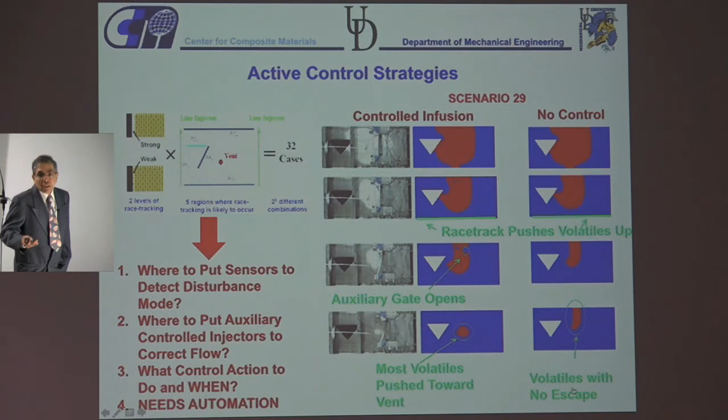So then I have two auxiliary gates. I introduce the resin from the two sides, but I also have two auxiliary gates here and here, and my vent is over here. The goal is to try to push the resin towards the vent based on which scenario is taking place.

I'll show you, if you didn't use any control, for example, and there was race tracking along here, the resin will reach the vent and you'll end up with a void here. If you use the control, you will open this auxiliary gate and push the resin towards the vent, and you'll be able to get a good part.

As you can see in the experiment here, I'll show you the actual simulation. Here at the top are where we have the sensors, and here we don't take any control action. So whatever scenario is taking place, if I have race tracking along here, once the resin reaches the vent over here, I won't be able to fill this completely.

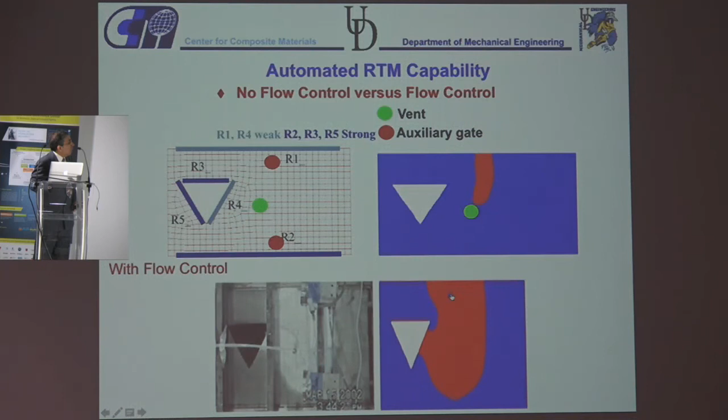Now here with the control action, the sensors say, okay, it's scenario number 29 that's taking place, and the control action is to push, when the resin reaches this sensor, push the resin with this auxiliary gate towards the vent. As you can see in the experiment and in the simulation, it pushes it towards the vent, and you're able to fill the part.

Now the good thing here is the worker does not have to know where the race tracking is taking place. They just cut the preform, put it in the mold, and the system will identify what is happening.

We did this 14 times, and every time it was a different race tracking scenario because our sensors were telling us what race tracking scenario it was. Out of the 14 times, 12 times it filled perfectly. The 2 times it failed was not because of a control action, but because the sensors failed. So what it told us was you need to put in redundant sensors into the system.

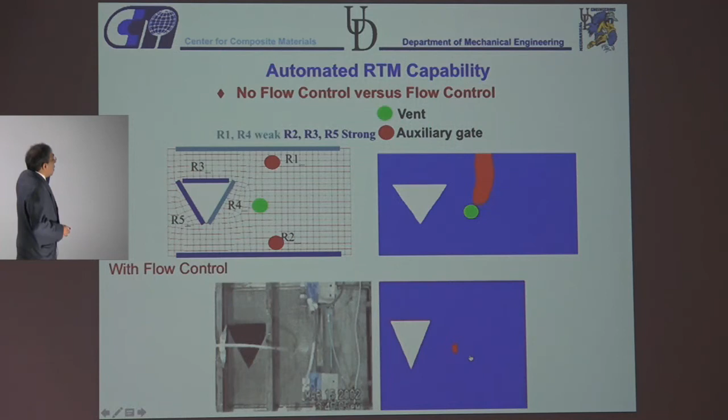So the nice thing about that is we call this intelligent manufacturing, but basically it's sensors and simulation based. You have a part like that, you design your mold, you design the interface of where to put the sensors, where to put the auxiliary gates, and then you build it into your system so that you get a good part every time.

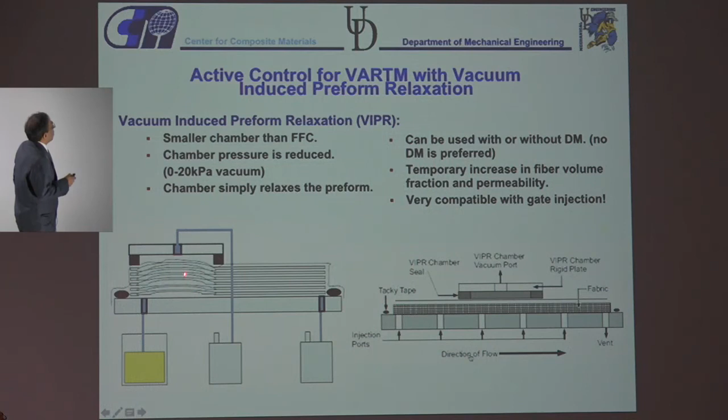Okay, so that was in RTM, in RTM you can do that. Now what about VARTM? I can't push the resin because once I start pushing the resin, the bag will just go up, right, because it's under vacuum. So you do the reverse. We have a chamber that can apply a vacuum anywhere, or it can relax the vacuum. So by relaxing the vacuum, you increase the permeability of the fabric there. So the resin will always go to where there is less resistance.

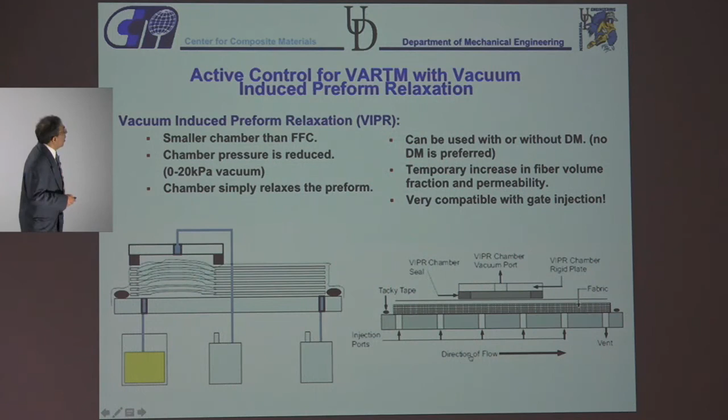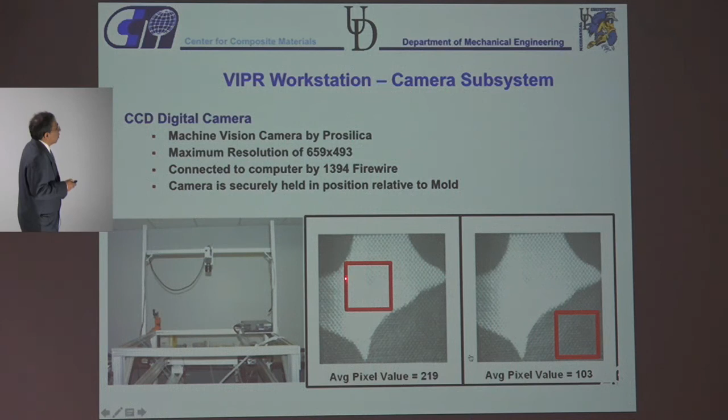So we actually built a setup where we would look with a camera as to where we want the resin to be, and then we would say, okay, we want the resin to come here, so we will have a chamber that will sit here and increase the permeability and steer the resin over there.

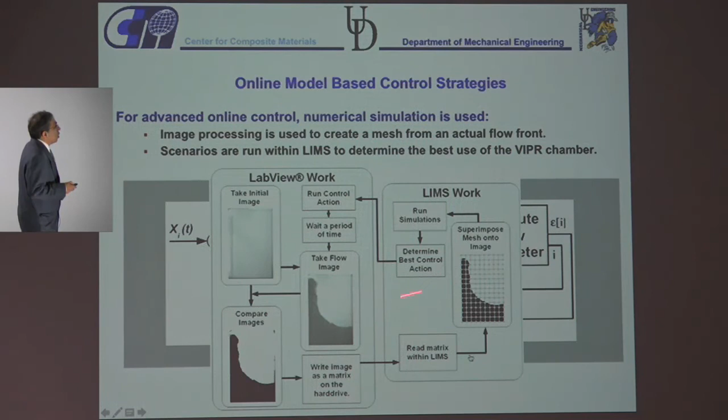So we actually built this system where we could connect LabVIEW and the LIMS, and this was online. From the camera, we'll say, okay, this is where the flow is. We'll convert that into a mesh, and run the next 2-3 time steps to see where we want our chamber to be, and then give that instruction to the chamber, and the chamber will go out there, and that's how we automated it.

So I'll show you this where it was fully automated. It's a simple example, but you could have race tracking along here or here, and the camera notices it, and then it tells the chamber to move. You can see that the resin is coming in, there's race tracking, so the chamber goes there, so the resin goes there, and you can see the chamber moving to where there is no resin, allowing the resin to flow over there.

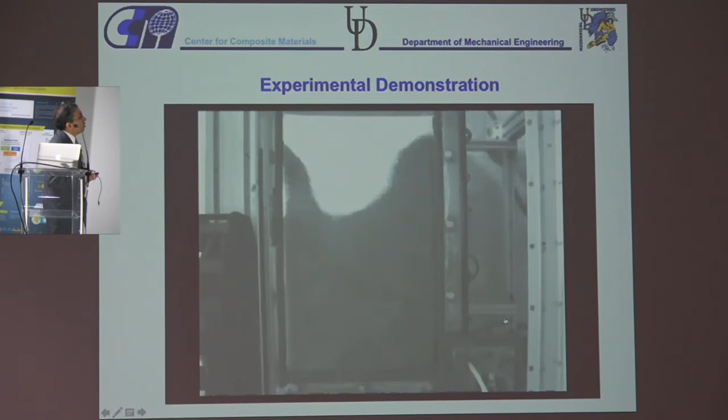And as I noticed in your IRT, you had a robot that was doing the painting, right? So you can use the same robot to do something like this, where you can actually guide the flow in a VARTM process based on some of the things you see.

So this is my real dream in the end: you design a part, you figure out where you want your vents and your gates and how you want to control it. And then through a LabVIEW interface, you can just connect that and make a good part every time. And you can build it into your machine.

So, bringing the scientific understanding to a point where not every person who's working on the shop floor has to know what is behind it. It can be a black box for them.

So this is my last slide. Some of the remarks I want to make here: macro voids happen because of race tracking along the corners and edges, micro voids due to dual scale and maybe some volatiles. I've shown you that flow simulations can be used to prevent these voids with proper injection path design and introducing flow control. So these simulations can eventually help in developing automated manufacturing systems and platforms so that you can improve composite manufacturing and reduce cycle time.

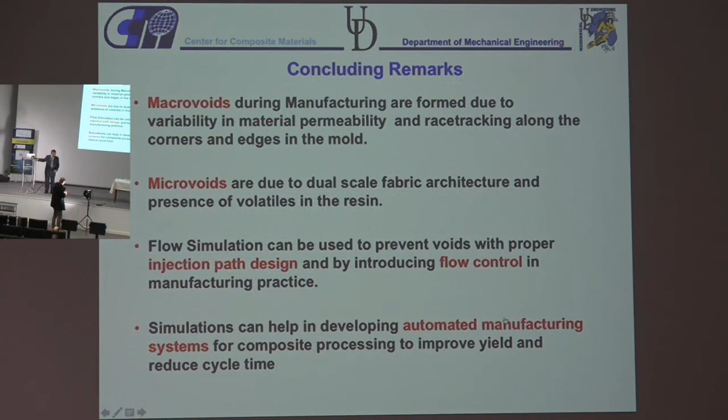Thank you very much, Suresh, for this very pedagogic presentation. I guess that people who were not convinced before your presentation of the importance of process modeling now have a good view and insight of what can be done using such kind of modeling for process optimization. Okay, please feel free to ask some questions to Suresh.

Thank you very much for your presentation. Are you able, as an output from your simulation, to give this as an input? You didn't speak about it, but to behavior laws, deformation and failure simulation—are you able to take output from your simulation and provide them as input to other simulations, and predict the complete chain from process modeling to material simulation, virtual allowable simulations?

I mean, in principle, this could be done. Part of the problem is getting the right platforms together.

What we have been able to do—I don't have the slide here—is when somebody is designing a CAD part, in the background we can create a mesh and run the simulation and say, okay, this is not going to be a good filling, you may get a void here, maybe you can relax the corner here, or do something somewhere else, and give that feedback to the designer. So the designer is not just designing the part and throwing it over the fence, telling the person to manufacture it, but at the same time getting feedback as to how easy it is to make that part and so forth.

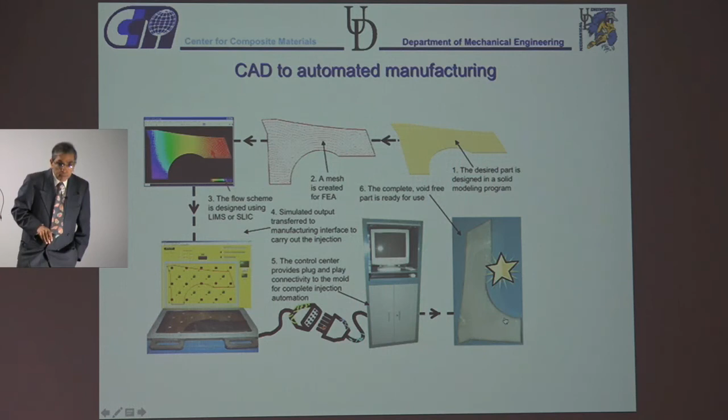Can you predict the fiber disorientation during the process? In this process, usually you have a fabric and the fibers are continuous, and they usually don't change orientation - it's the resin that's flowing between the fibers. But in high pressure RTM, there is an issue of fiber washout. The pressure is so high that fibers can actually move aside and create larger defects like gaps, which is what you're referring to. Those gaps can be detrimental for your mechanical properties because that's a real defect.

Other questions? I have one. Here in your presentation, you mainly focused on RTM processes, liquid injection processes. Have you also done some work on, for example, prepreg processes or thermoplastic prepreg consolidation processes?

Yes, I have a complete other talk on consolidation of prepregs, basically in out-of-autoclave processes, and I can summarize a bit of what we discovered through our processing science. When you do something in the autoclave, you apply a lot of pressure, and because of that you can prevent the volatiles from growing, so your void fraction is very low. In out-of-autoclave processing, you only have 1 atmosphere of pressure, so you tend to get more volatiles.